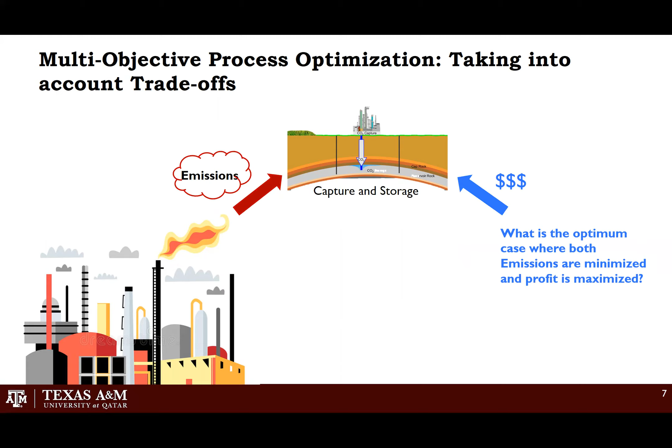An aspect that takes into account the trade-off is multi-objective optimization. It answers questions like, what is the optimum case where emissions are minimized and profit is maximized? So, it simultaneously optimizes more than one objective function, such as economic and environmental performance.

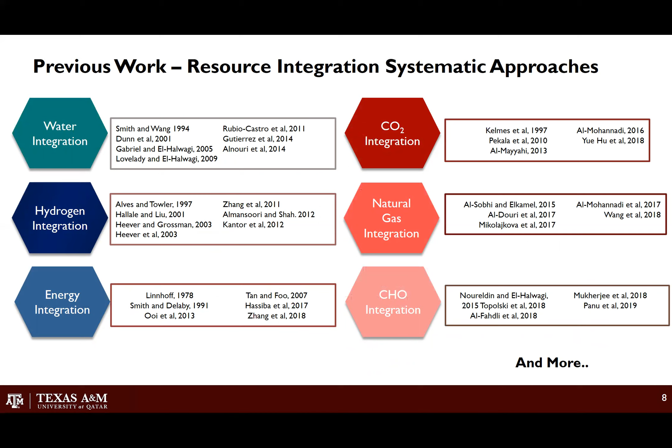Previous work has been done in both the area of resource integration and multi-objective optimization. In resource integration, multiple approaches have been introduced that integrate water, hydrogen, energy, natural gas, and CO2 within clusters. However, these methods integrate 1, 2, or a maximum of 3 resources at a time.

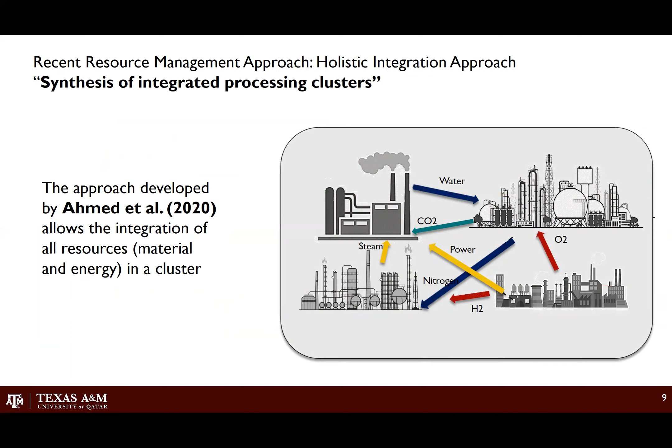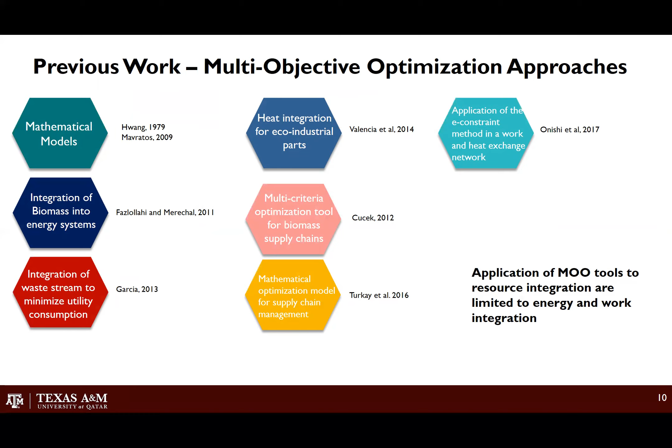A recent approach introduced by our team in the paper, Synthesis of Integrated Processing Clusters, takes into account this gap and introduces a holistic integration model that allows the integration of all possible material and energy resources. In terms of multi-objective optimization, mathematical models have been introduced and applied in the area of process integration. However, the application is mostly limited to energy and work integration.

Two of the most prominent multi-objective optimization models are the weighted average method, where objective functions are identified, each objective function is assigned a weight, and then an overall performance indicator is optimized. Another method is the augmented epsilon constraint method, which is an improvement of the original epsilon constraint method, where the multi-objective optimization problem is converted to a single objective by setting constraints. The two methods result in a Pareto set of solutions in which each solution is optimum and represents a trade-off between the objective functions.

Our proposed method is the multi-objective integration model, in which we use the holistic resource integration model introduced by our team earlier, and we use the multi-objective optimization models to introduce a new approach that allows the simultaneous optimization of more than one objective function of an integration network, where all resources are allowed to be integrated in a cluster. So I will be presenting first the integration model, then the multi-objective optimization models, and then the superstructure that illustrates the whole method.

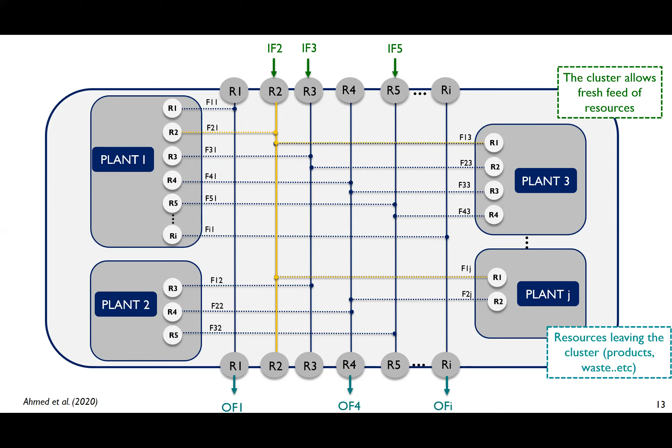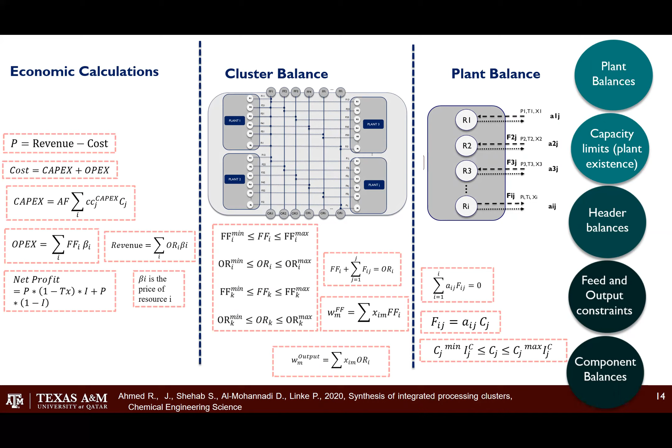which takes me to the next step, which is generating different weight assignments. Different weight assignments are generated in order to generate different optimum solutions. And in order to guarantee fair distribution of the weights and covering a wide range of different distributions, we specify an increment and we create a matrix with all the possible weight assignments for the specified increment, and where all the weights for the objective functions add up to 100%. Finally, for each weight distribution, the overall performance indicator is optimized and the optimum solution is obtained.

The picture we see here shows the whole optimization approach. On the left side, we start with the integration model, in which inputs for that are process parameters, resource conditions, and cost parameters. And then this model gives us information about the economic, environmental, or it could be social performance of the cluster, and these act as input to the multi-objective optimization model. From the multi-objective optimization model, we get the Pareto optimal set of solutions, which are basically economic or environmental or social performances, and each optimum solution corresponds to a different cluster design.

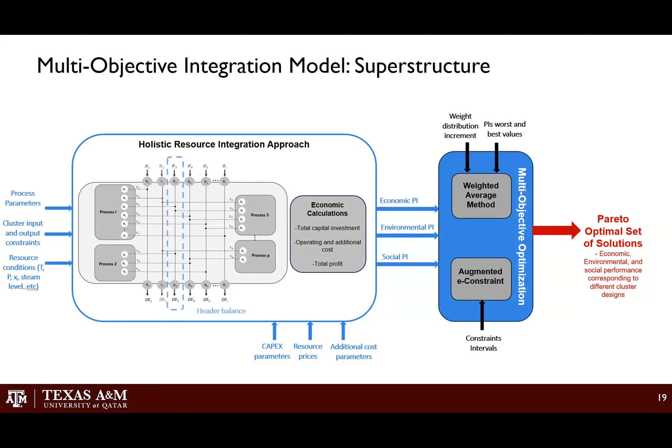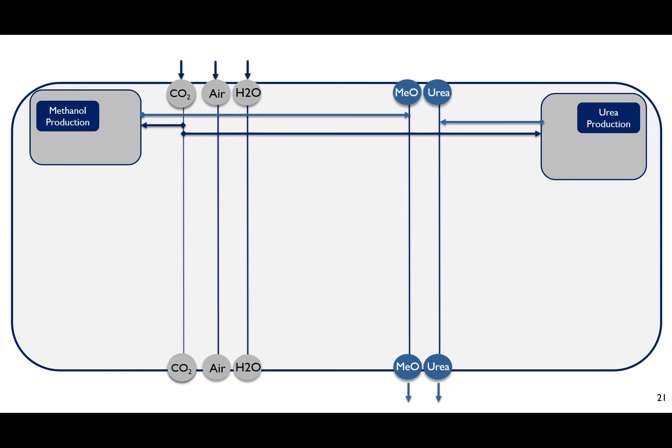I will illustrate our method now through the multi-objective optimization of a carbon dioxide converting cluster. The cluster we're looking into utilizes CO2, water, and air as the only raw materials. Two products that can be synthesized from CO2 are methanol and urea. So we add production plants for those. Since more raw materials are needed for the production of these products, such as ammonia, hydrogen, and nitrogen, which are all intermediates, an air separation unit, water splitting, and ammonia production are added. These units come with emissions and waste streams as well, and they consume energy.

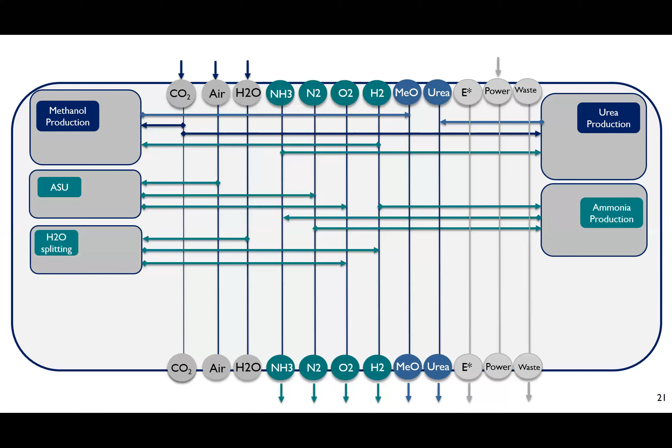So resource lines for those are added as well. In order to allow emission capture and further CO2 conversion, carbon capture unit and sequestration are added. And also, a unit for water treatment is added as well.

The cluster is required to convert 120,000 metric ton of CO2 per year, which enters at no cost, and a tax of $20 per ton is imposed on any CO2 that leaves.

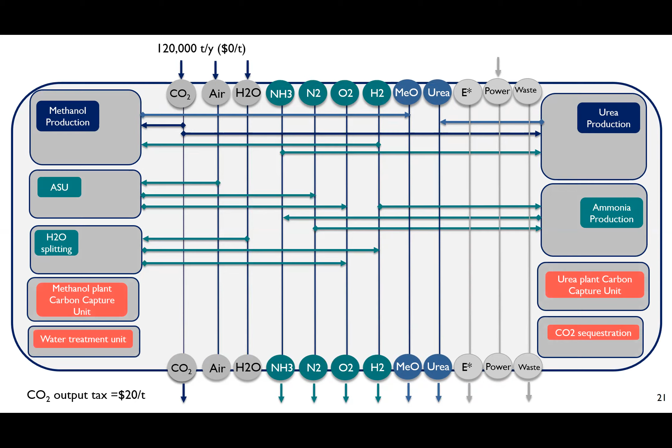The two objective functions of the study are economic and environmental performance. The environmental performance indicator is the CO2 emissions, which comes from the methanol and the urea plants, and also their capture units. For the economic performance, the performance indicator selected for it is the profit, which comes from selling methanol, urea, and ammonia.

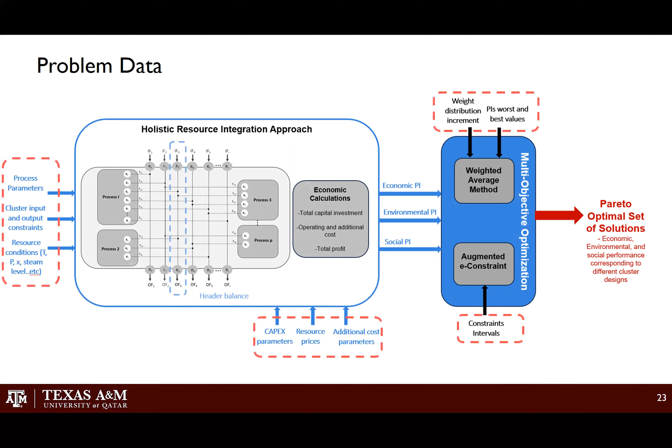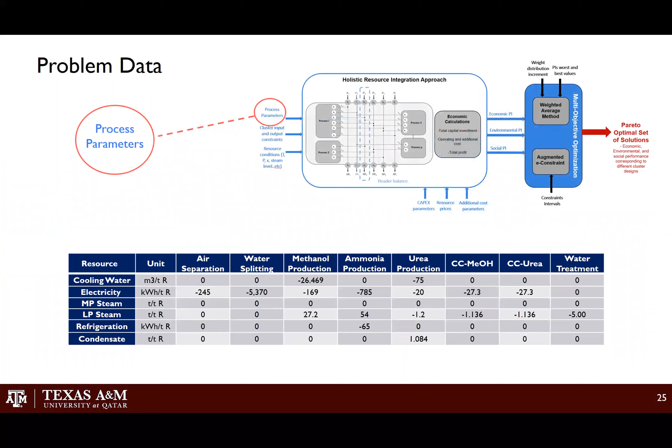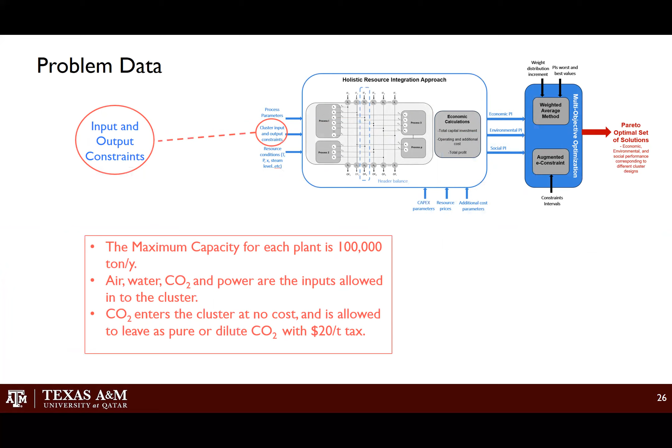As explained before, the problem data are the inputs needed for the two models. We have the material process parameters, the energy process parameters, constraints, where here we have a maximum capacity of 100,000 ton per year for the production of the plants.

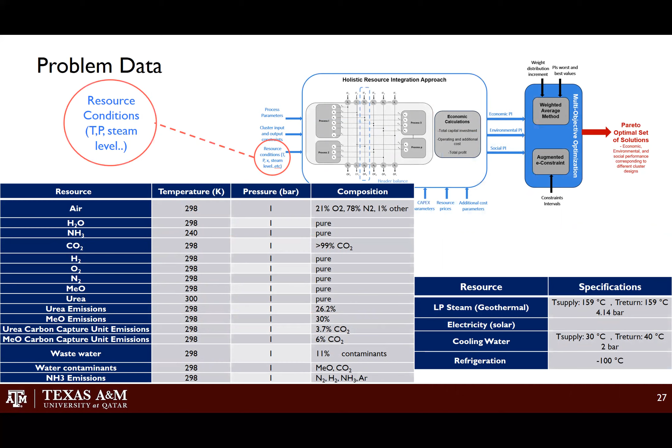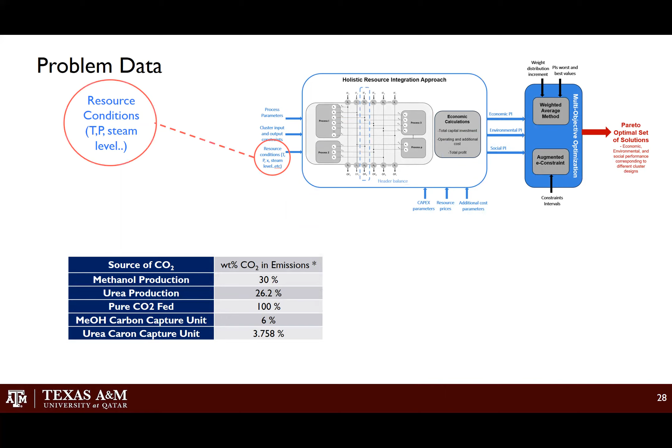We also have resource conditions, which are specified for each line in terms of temperature, pressure, and composition. We also have the composition of the carbon dioxide in each stream that leaves the cluster. Cost information are also available in terms of capital costs and resource prices.

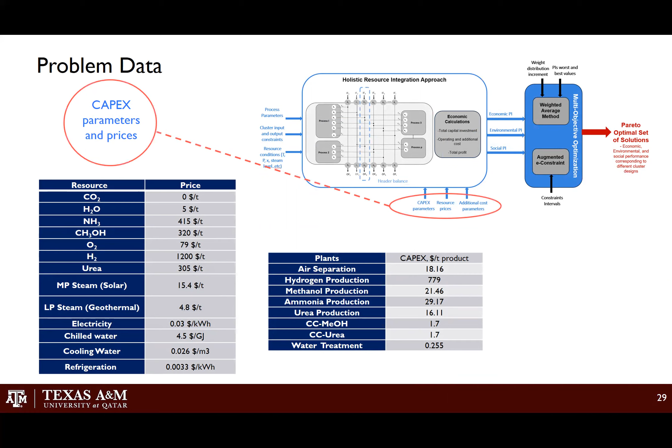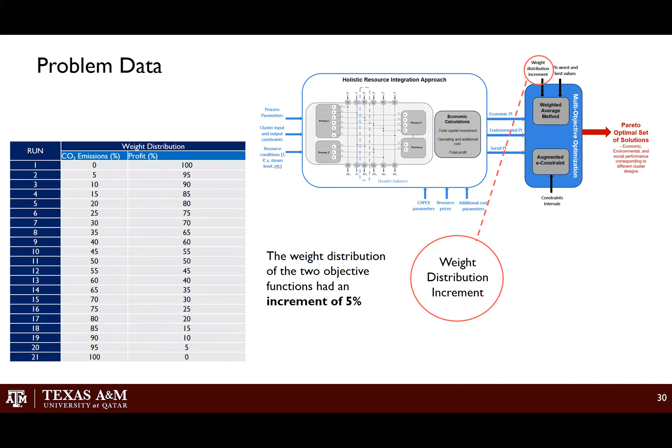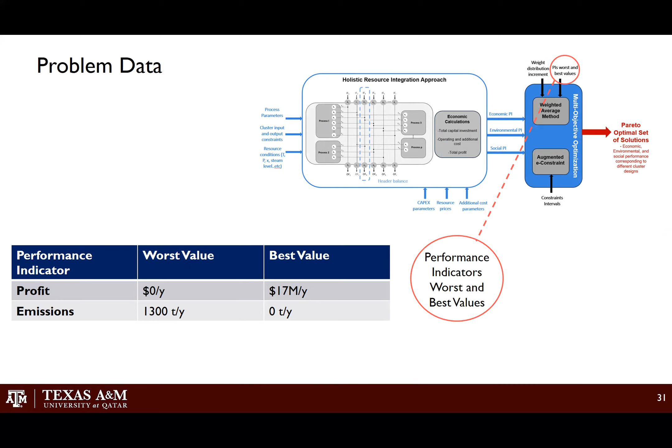For the weighted average method, an increment of 5% is selected, and the table here shows the weight distribution between the two objectives. And best and worst values for each performance indicator are also specified for the weighted average method. For the augmented epsilon constraint method, a total of 10 constraint intervals are selected within the payoff table.

The graph shown here illustrates the result of the multi-objective integration approach using the two methods. We see here that there is a trade-off between the two indicators, since increasing the profit increases the emissions. And as can be seen, the Pareto curves of both methods are identical.

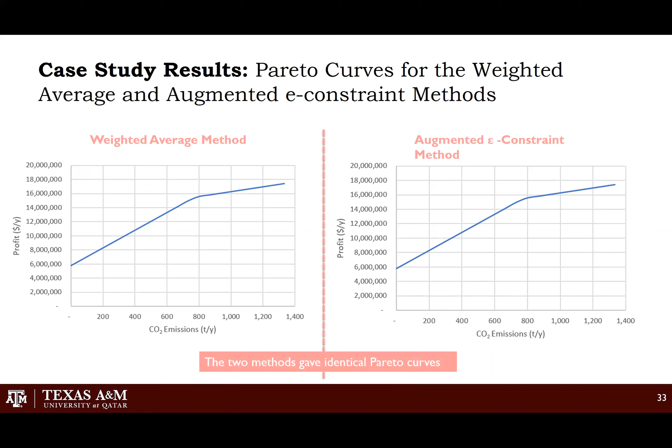Each point in the curve corresponds to a different design, as in different capacity for each plant in the cluster. However, three main designs were obtained. In the first region, highlighted in pink, all production plants are active and excess carbon dioxide is sequestered. In the second region, highlighted in yellow, methanol plant is deactivated and more CO2 is sequestered since less emissions are allowed.

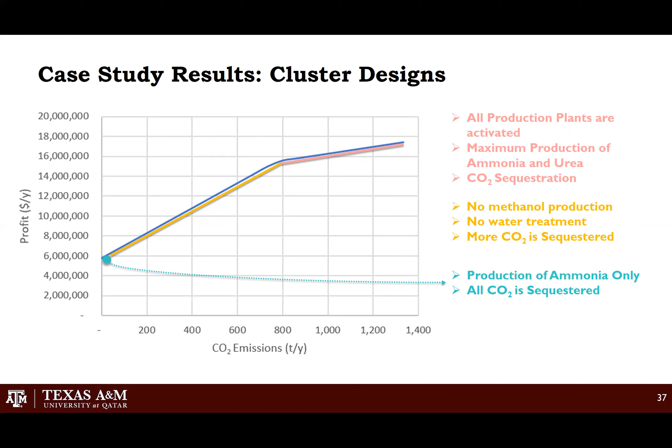And then in the third design in blue, which is at 0 emissions, here urea and methanol plants are both deactivated since all have inefficient carbon capture units and only ammonia is produced. This design still corresponds to some profit since both ammonia and oxygen are being sold.

To conclude, in this study, a multi-objective integration model was proposed, which combines an integration model that allows interaction of multiple resources and two multi-objective optimization models, which are the weighted average method and the augmented epsilon constraint. The model allows the integration of all resources in a cluster while simultaneously optimizing the economic and the environmental performance.

A CO2 converting cluster was optimized using only air, water, and carbon dioxide to produce value-added products, and it was optimized in terms of profit and carbon dioxide emissions. Then Pareto curves were generated that capture the trade-off between the two objective functions, and we concluded that the weighted average method and the augmented epsilon constraint method result in the same Pareto curves.

In this case study, we looked into the economic objective function and the environmental objective function. So we optimized two objective functions at a time. Current work that we're exploring is the extension to three objective functions. Therefore, we added the minimization of resource depletion, and in this case, we looked into water consumption as a performance indicator, in which the total water consumption is the summation of all the water that's fed into the cluster.

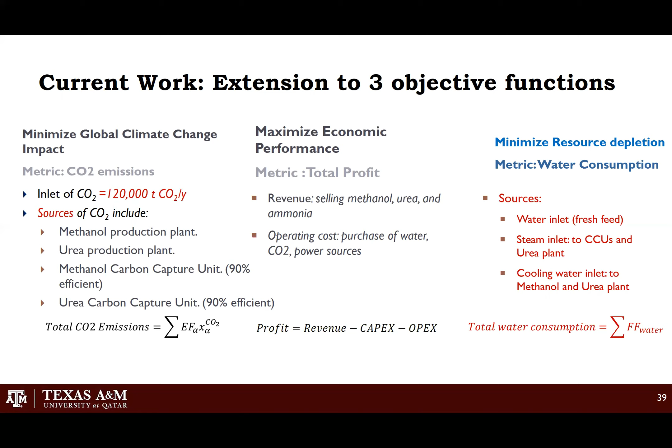Therefore, what we're trying to accomplish is to generate a Pareto curve that includes Pareto optimal solutions of the three objective functions at a time.